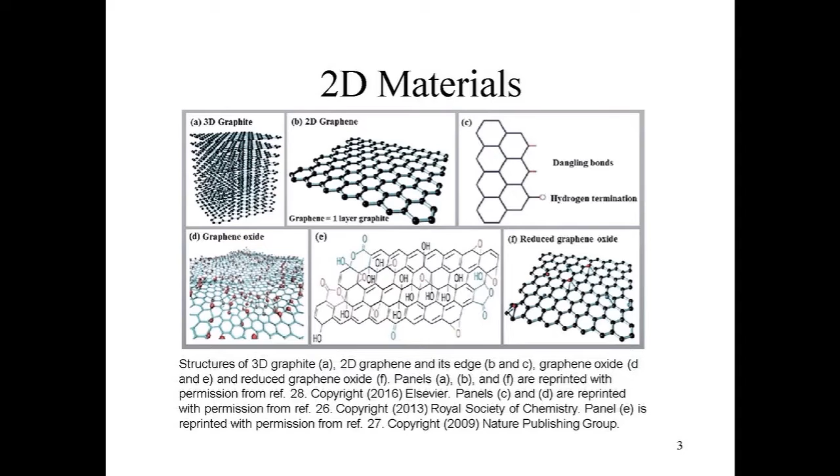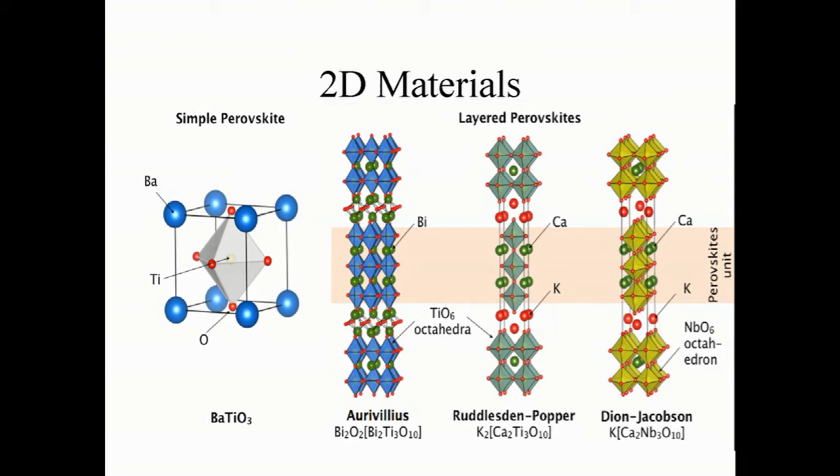Calcium niobium oxide is the subject nanosheet. This nanosheet is obtained by exfoliating layered perovskite, potassium calcium niobium oxide, and it was successfully obtained in the form of solution last semester and reported as a first part of the study.

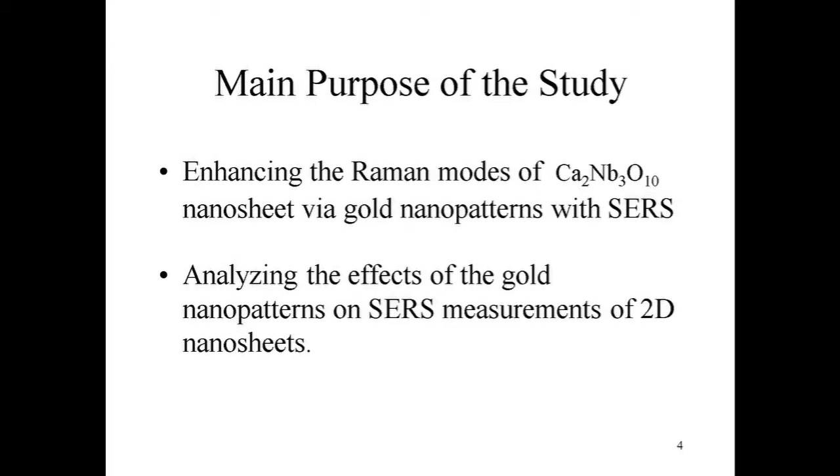This is supposed to be a surface-enhanced Raman spectroscopy application study. Normally, Raman modes of small inorganic particles cannot be analyzed since the Raman modes of the particles are significantly weak. Purpose of the study is to enhance Raman modes of the calcium niobium oxide nanosheet by using gold nanopatterns and analyzing the effect of the gold nanopatterns on surface-enhanced Raman spectroscopy measurements of 2D nanosheet.

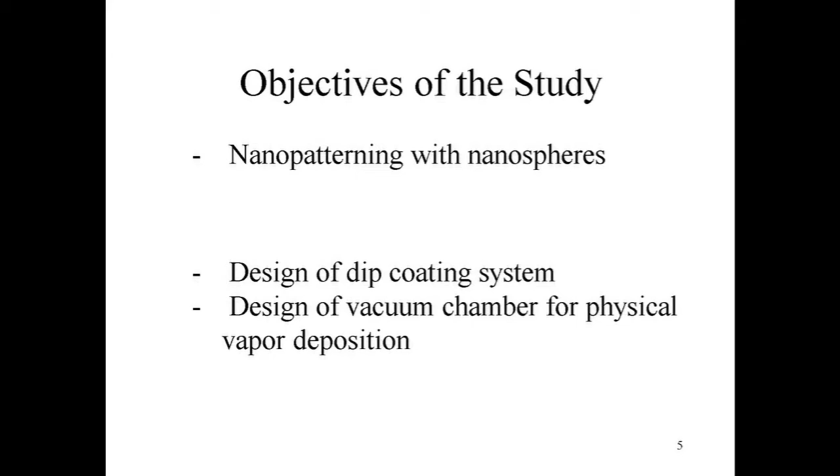Focused on the purpose, objectives of the semester are given: nanopatterning with nanospheres, monolayer coating of nanosheet, calcium niobium oxide nanosheet SERS measurement, surface-enhanced Raman spectroscopy measurements. However, because of the pandemic situation, coating of nanosheet and SERS measurement couldn't be done. Design of dip coating system and design of vacuum chamber for physical vapor deposition was carried out instead.

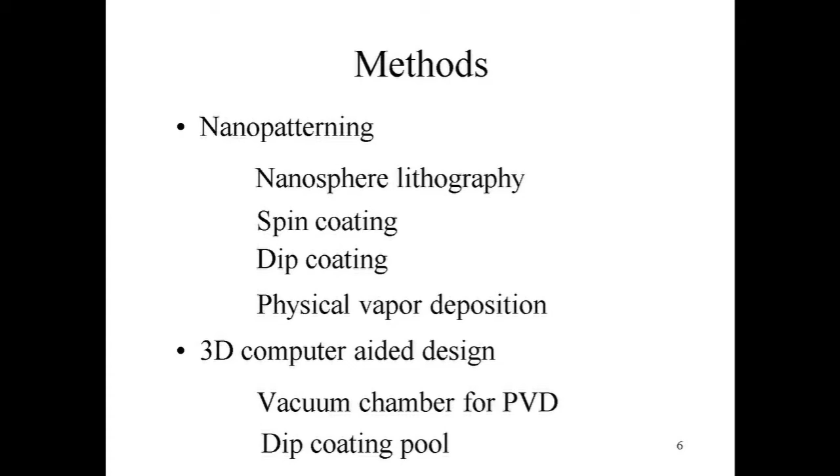In the semester, nanopatterning method was applied. Nanosphere lithography was carried out together with spin coating and physical vapor deposition. And for design objectives, computer-aided design technique was used. Deposition of materials in atomic size to obtain nanopatterns is called nanopatterning. There are several ways to perform nanopatterning.

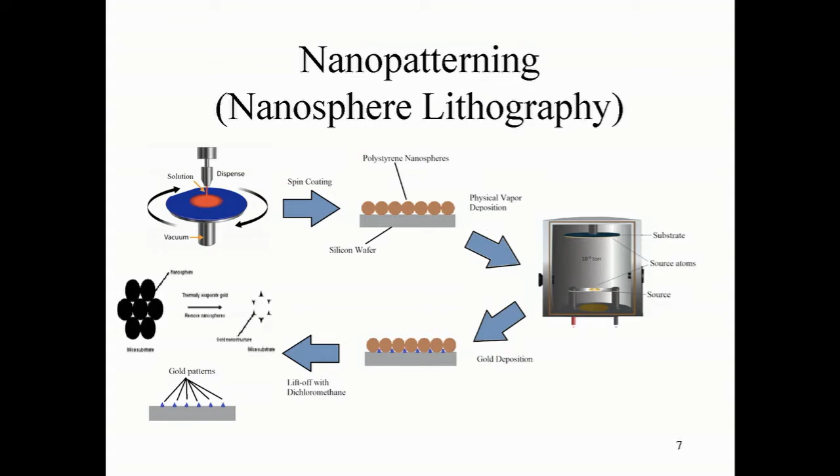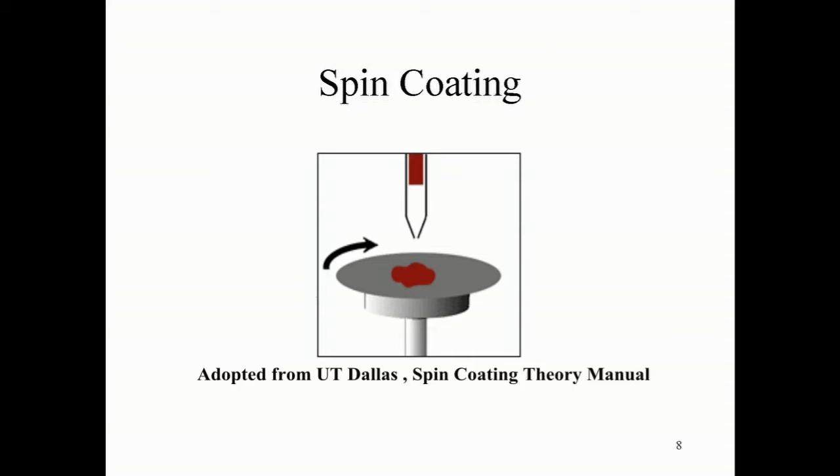In our experiments, we carried out nanosphere lithography together with spin coating and physical vapor deposition method to obtain hexagonally packed gold nanopatterns. For obtaining a polystyrene nanosphere mask, we use spin coating. Spin coating is a procedure to deposit coating material onto a spinning substrate to acquire thin films. According to literature, parameters for spin coating were determined and coating operations were carried out. SEM images of coated mask will be introduced in the next slide.

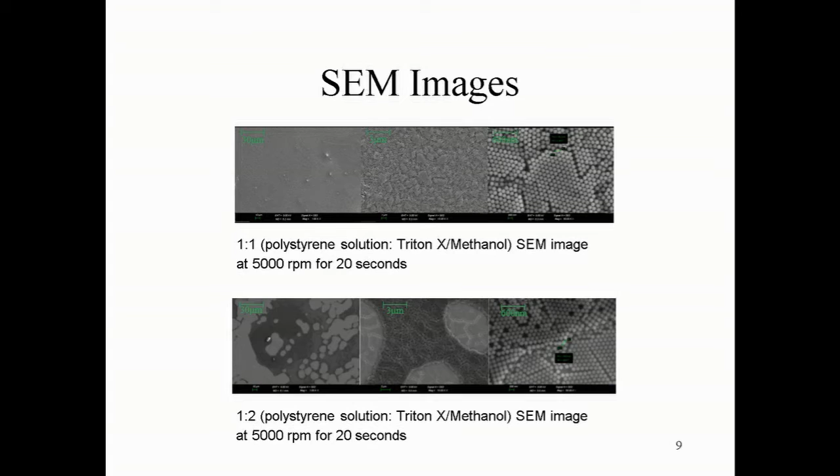We can see there were monolayers in both coatings but in a tangled structure, and the 1/1 proportion had heavily uncoated areas that we did not want. With solution of 1/2 proportion, there were again uncoated areas with monolayers on the surface of the wafer. When we look at both proportions, we can see that 5000 rpm was not enough for polystyrene nanospheres to spread on the surface of the wafer. Therefore, we decided to increase the speed and time of the coating.

Here, with solutions of 1/3, 1/4, and 1/5 proportion, there were bilayer and monolayer structures formed together, while having uncoated areas more than once. With 1/7 and 1/10, the monolayers were formed together well, but the uncoated areas were far larger due to overspeed of the coating.

After the masking, physical vapor deposition was operated. With the method, source material is heated and its phase is changed to a vapor phase, and then back to a thin film condensed phase in a vacuum atmosphere. Having tested various parameters with spin coating, we passed to the deposition step with the most proper coatings and lifting the mask off from the gold particles.

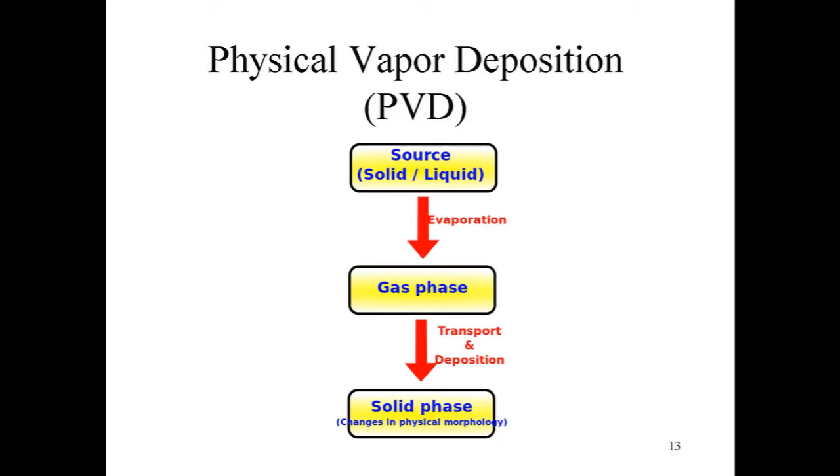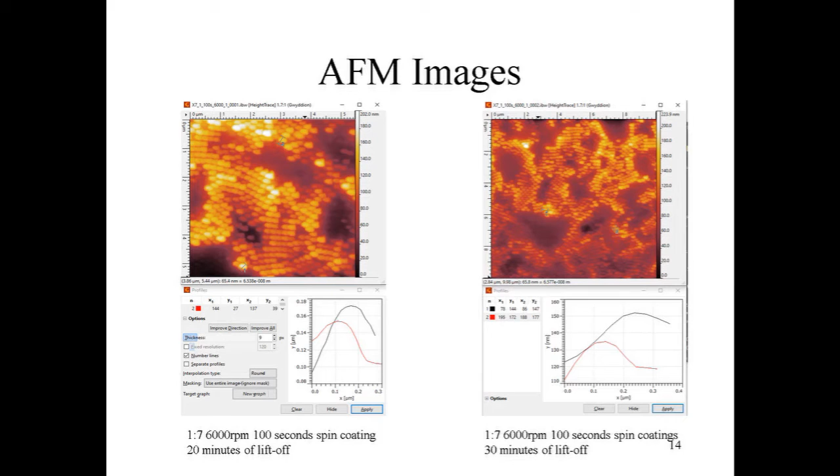After the deposition of the gold particles and lift-off for 20 to 30 minutes, we can see that there were still nanospheres on the surface, and they were not removed well with the current lift-off stage. Here are the steps from before the gold deposition to a total of 57 minutes of lift-off, respectively.

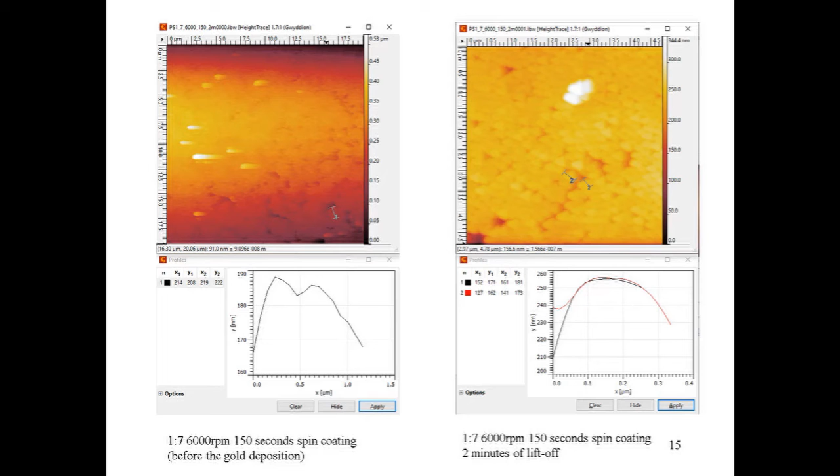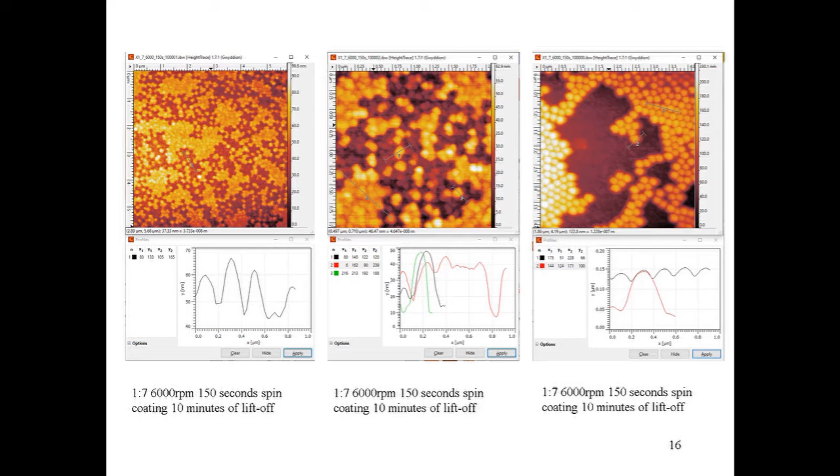Checking after 2 minutes of lift-off, we can understand the nanospheres were not fully removed, and we continued lifting off. After 10 more minutes of lifting off, there were still polystyrene nanospheres around and under the gold particles. Hence the structure starts to fall apart in pieces. Lifting off for 45 more minutes shows that we were not successful in removing the nanospheres under the gold particles.

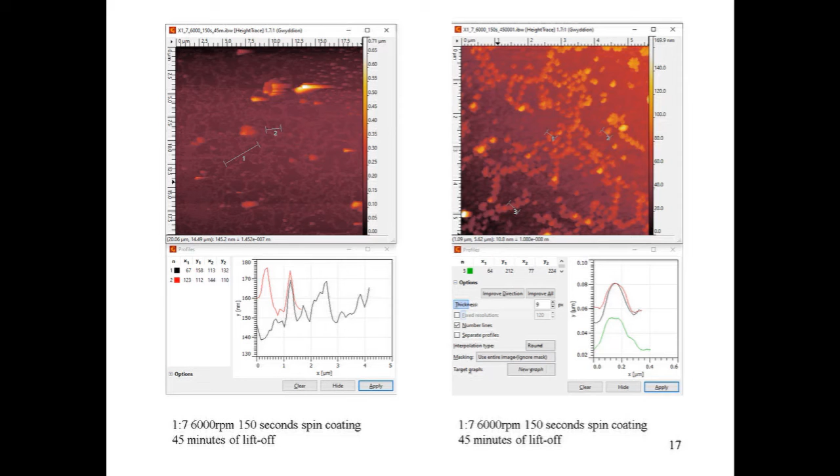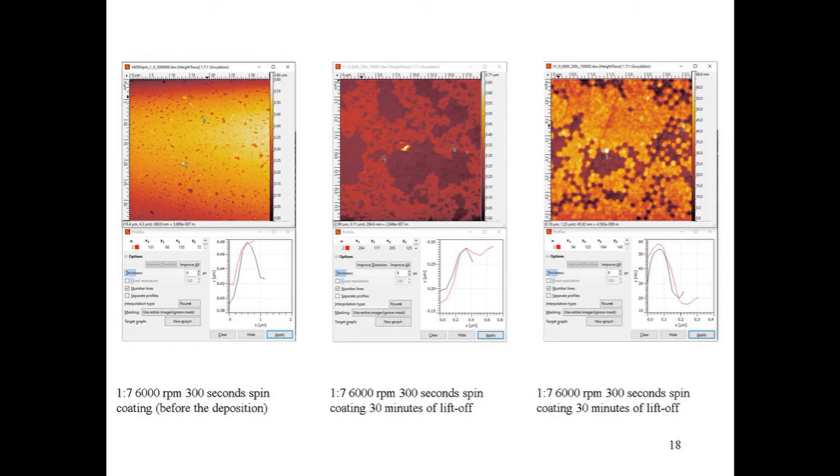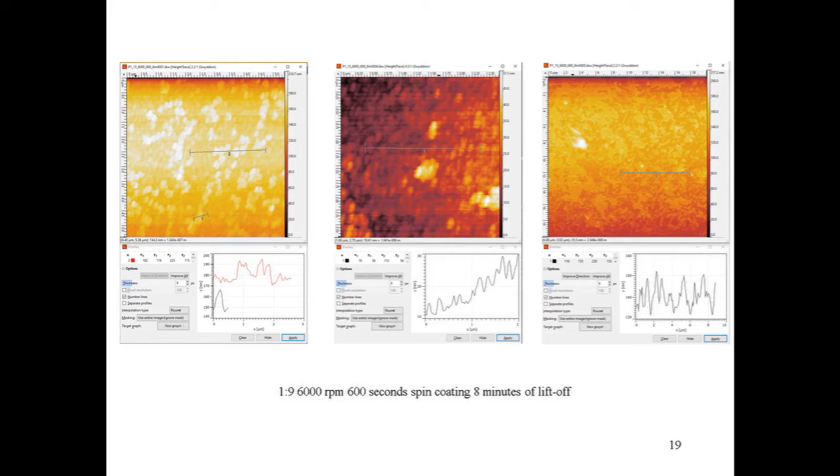And when we look at another example, from before deposition to 30 minutes of lift-off, again, nanospheres under the gold particles were not removed properly. Then we decided to change the proportion of the solution from 1/7 to 1/9. After lifting off for 8 minutes, we saw the same result as the others, which is non-removal of the nanospheres from under the gold particles.

Another sample at the same parameters was lifted off for 15 minutes. We understood that 200 nanometer polystyrene nanospheres were not appropriate for our experiment. So we decided to increase the diameter of the nanospheres and change our coating method to dip coating.

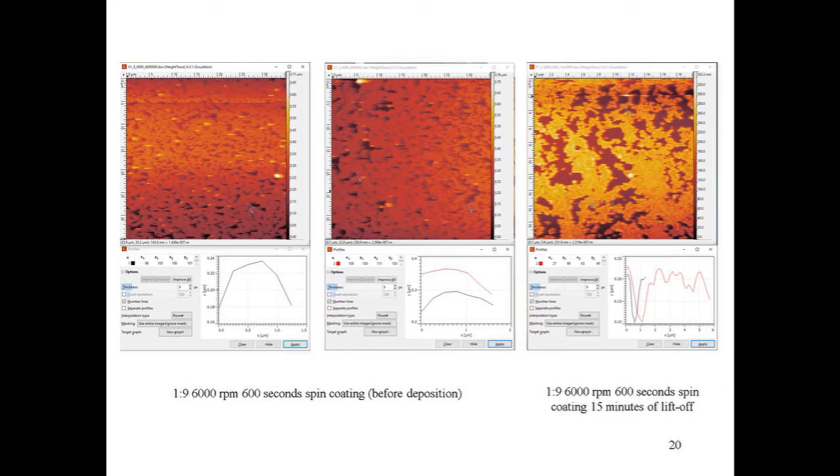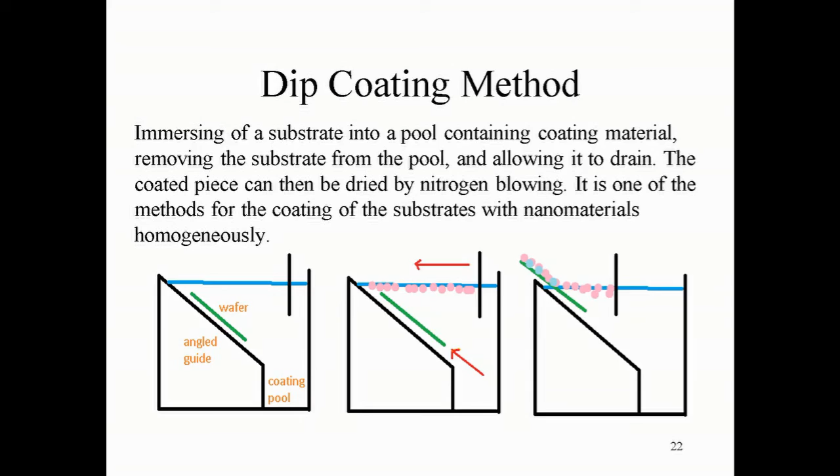For the upcoming coating operation, a dip coating pool was designed. According to the literature review about dip coating, the pool was designed with 4 separate pools, each with a different angled guide slider, to be a convenient general purpose dip coating tool. Teflon was considered first as a material, since it fulfills chemical resistance requirements with good smooth surface properties. After more material search was done, polyoxymethylene, known as Delrin, was chosen, since it is also chemical resistant and has a smooth surface, but is cheaper.

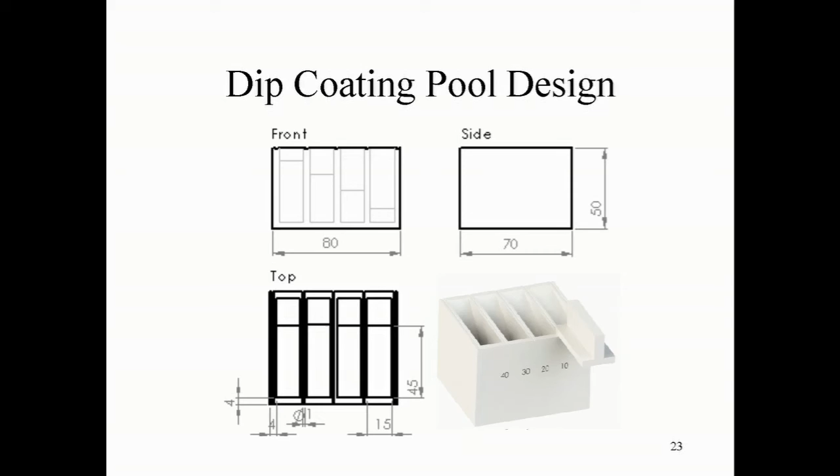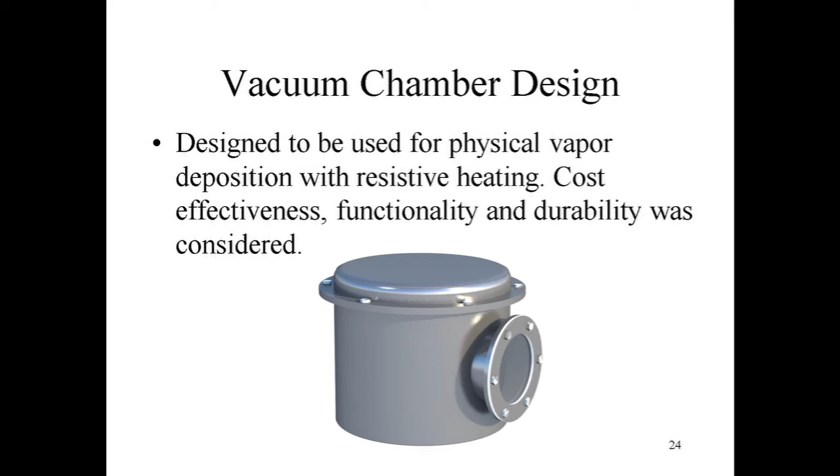Next is the vacuum chamber design. The vacuum chamber was designed for physical vapor deposition with resistive heating. We focused on cost effectiveness, functionality, and durability. The vacuum chamber will operate under high vacuum conditions, so it's very essential to tolerate the pressure forces and prevent any gas leakage. Cylindrical body geometry was chosen, since a cylindrical body is stronger against pressure forces and requires a shorter welding line.

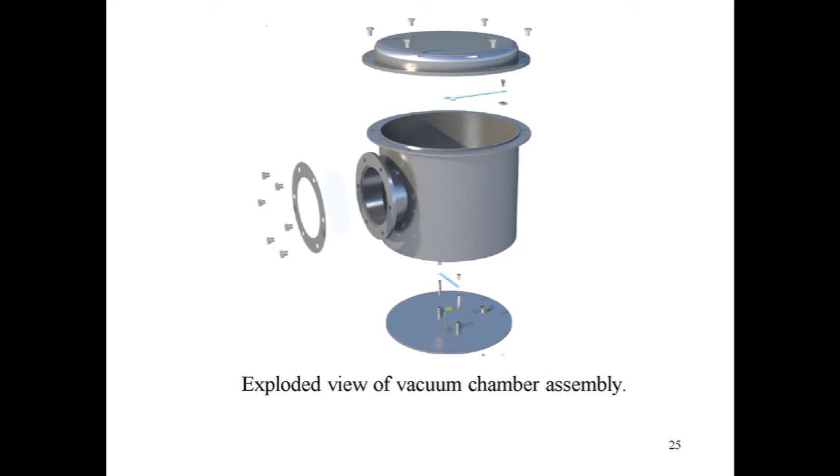Chamber material was considered as 316L or 316LN steel. We avoided designing parts with complex geometry and kept the parts easy to manufacture. This reduced the manufacturing costs. Most of the parts could be manufactured by simple sheet metal cutting and shaping operations. The chamber has a changeable wafer holder. The wafer is put right at the top of the boat. The holder was connected to a small interface welded on the side wall with a butterfly bolt.

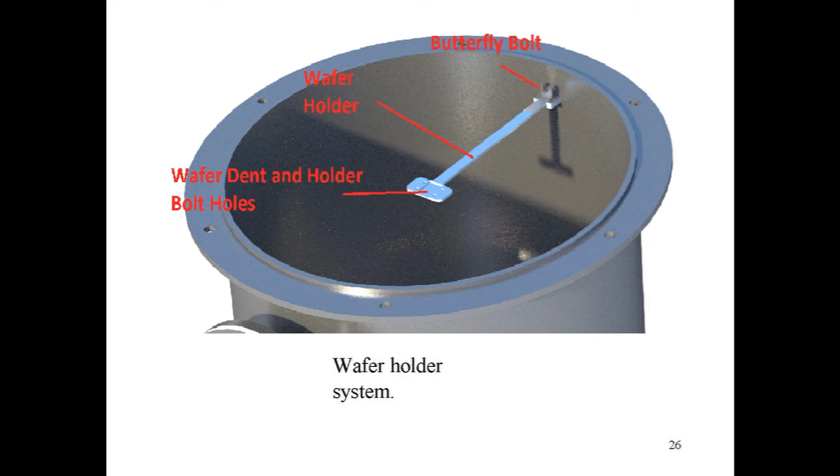For the resistive heating operation, ceramic coated cylindrical copper electrodes were considered together with resistive tungsten boats and a ceramic metal composite shutter. For proper deposition, the shutter must keep the source material inside the boats until the material reaches the required temperature.

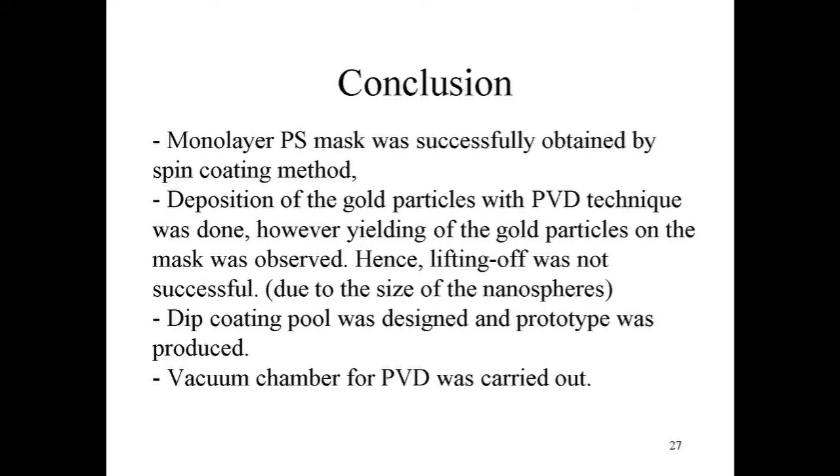A monolayer polystyrene mask was successfully obtained by the spin coating method. Deposition of the gold particles with the physical vapor deposition technique was done; however, yielding of the gold particles on the mask was observed. Hence, lifting off was not successful due to the size of the nanospheres. A dip coating pool was designed and a prototype was produced. The vacuum chamber design for physical vapor deposition was carried out.